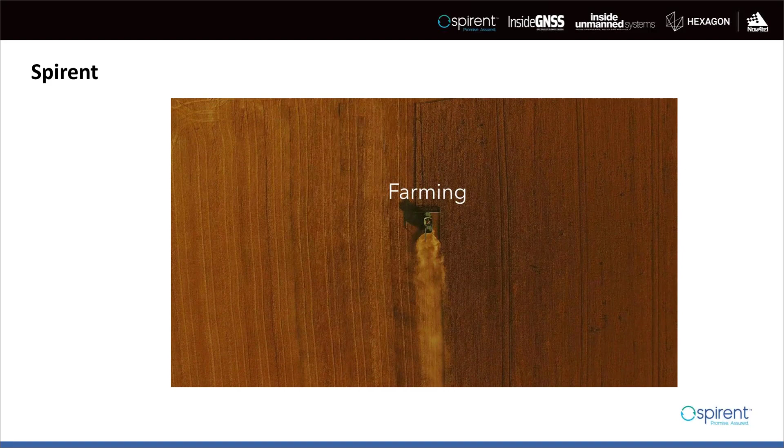You may know Spirent as a GNSS simulator provider. This is something we've done for over 30 years and remains at the heart of what we do today. No one supplies more GNSS signals than Spirent. What you may not know is that in addition to our products, we provide test and evaluation services, and not just limited to GNSS. Increasingly, GNSS is used alongside other sensors and signals, and yesterday's talk did take you through some of our sensor simulations.

Spirent supplies test and evaluation solutions that provide coherent emulation of whatever combination of signals and sensors are required. To do so, we work with industry leaders across the sectors to provide integrated solutions. Our aim is to provide solutions to PNT test challenges that are realistic and support multiple signals and sensors. We do this from internal development and through partnering with industry leaders.

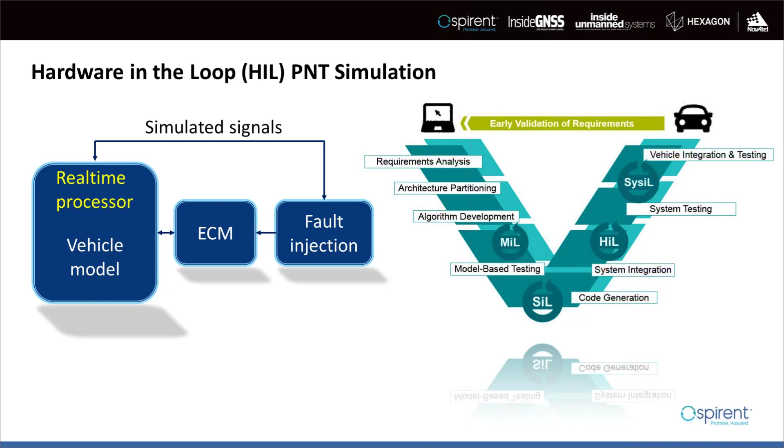To enable these failure modes to be set during each automated test, a fault injection unit is used, and as you can see on the plot, there is a fault injection block, which for our purposes is essentially a PNT simulation system. So what do we have here? Here is the setup of our vehicle sensor simulation in a HIL environment. Again, HIL is hardware in the loop for short. The simulator simulates all sensors, including GNSS, IMU, wheel ticks, and any or every other vehicle sensor.

The input to this simulator is a real-time 6 degree of freedom trajectory information that comes from a vehicle model from the previous slide, if you can relate this. Spirent does not believe in reinventing the wheel, and hence we're working with top-of-the-class vehicle modeling companies that provide realistic motion models and trajectories as input. We have also made sure to be compatible with almost the industry standard hardware platforms that are running real-time operating systems. This motion model is converted into RF signal for GNSS and is translated or mapped onto a CAN bus for other sensors and sent to either the ECU or a GNSS receiver.

Now, if you note from our previous V diagram on the previous slide, HIL comes just before the final vehicle level test or pre-production level testing, which does involve having a vehicle in the loop, which does get expensive. And you want to simulate the test environment in HIL with as much realism as possible to rule out any fundamental issues in the system before transitioning into the vehicle in the loop setup. So back to this setup here, as an option, we also offer a realistic multipath simulation capability to add the richness, to add the realism of the overall HIL rig. And Ali will be talking about the multipath simulation capability and ray tracing later on today.

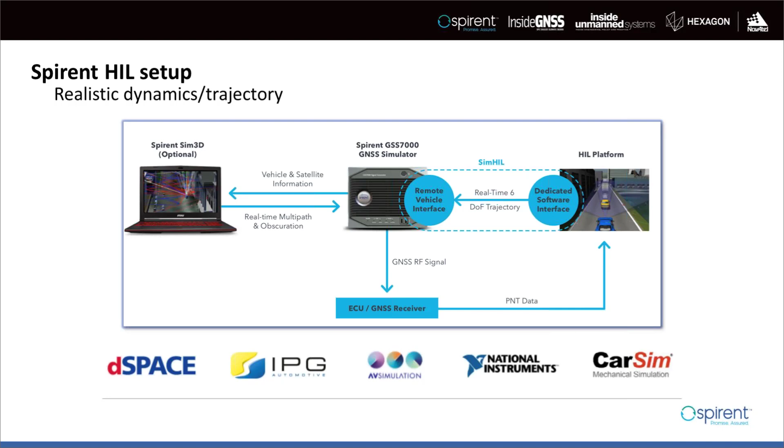So who needs HIL setups? So predominantly OEMs who want to test with realistic vehicle models can integrate GNSS or PNT in a bigger HIL rig.

As you might have picked up already, each HIL rig represents a single vehicle. In similar fashion, Tier 1s can also test in HIL environment by including relevant ECUs in the loop, but with a more generic vehicle model rather than a very specific vehicle model that the OEMs use for their testing.

HIL setups are gaining momentum in all industries, including UAV, aviation, and space. As you can imagine, the core of the system needs to be with low latency. And Spirent is known to provide industry-leading simulators with lowest system latency overall.

With that said about HIL, we think that the audience here will also be interested in understanding a bit more of how we can enhance PNT performance in a real vehicle-in-the-loop system. This is where tapping into the sensor connectors becomes critical to mock relevant sensor inputs.

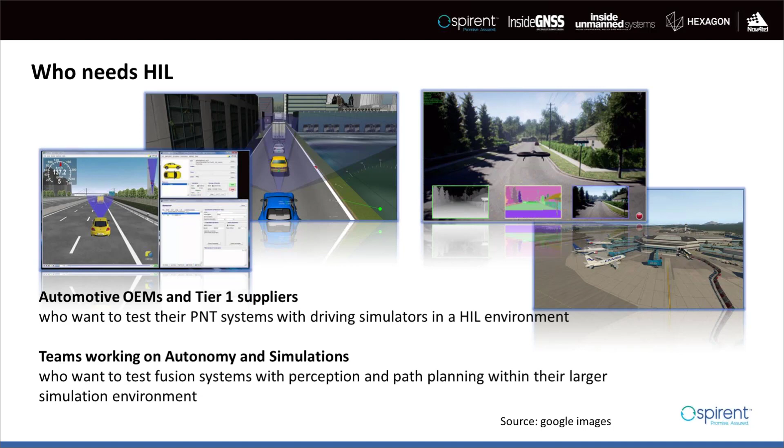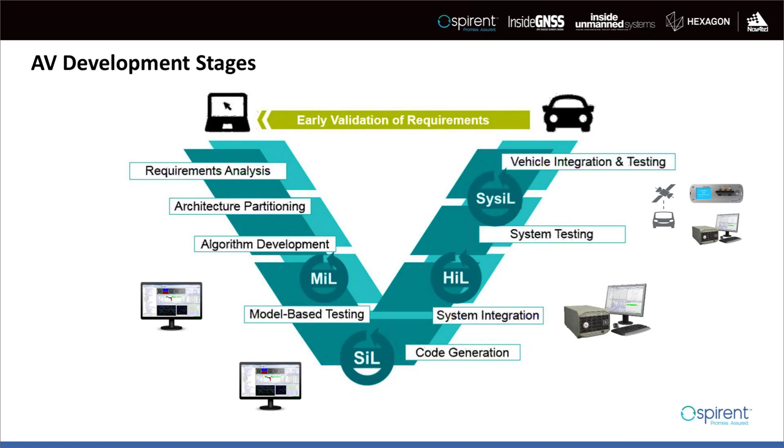As the development matures, different approaches will be necessary. For example, simulation will be necessary during the system integration and hardware-in-the-loop testing, as Ajay just highlighted. The final level of the validation stage will involve all three approaches of testing, including live sky. With a credible and realistic simulation, live sky testing will be minimized. I would like to highlight again this boundary diagram concept that Groot showed in yesterday's session.

Clearly, there are many faults that have to be considered. It was highlighted also yesterday by Lance that the only practical way to do such tests for a complete test coverage, including corner cases, is using simulation.

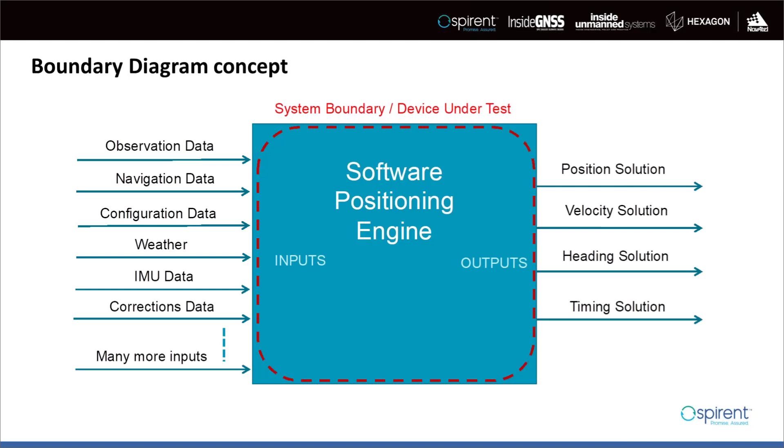GNSS simulation gives you the ability to manipulate all parameters in the three different segments of any GNSS constellation. Spirent GNSS simulator provides the ability to test many of the relevant errors directly using the internal models, or even indirectly by manipulating the constellation and the signal parameters, for example, the signal power level, code, or carrier phase.

Let's break the testing into basic and advanced level testing. Basic testing like time to first fix and position accuracy may appear unnecessary as those parameters are stated on the supplier datasheet, but it is also important to test for those because many errors and performance issues are introduced post-integration.

For example, what is your actual TTFF after integrating the antenna to the solution and then integrating the positioning solution within the vehicle alongside all the other systems that may affect the weak GNSS signal? It is therefore important to test even the basic parameters.

Advanced testing covers corner cases and focuses on application-specific testing, for example, multipath and obscuration in urban environment, and other signal vulnerabilities, which I will cover in more detail in the third session. Advanced testing also covers compliance testing, which Lance will cover in the next session.

So like with any test equipment, there has to be a good level of confidence in the test kit to ensure the credibility of the testing. This is particularly relevant for safety critical applications where human lives are at stake. When choosing your GNSS simulator, there are multiple factors to consider.

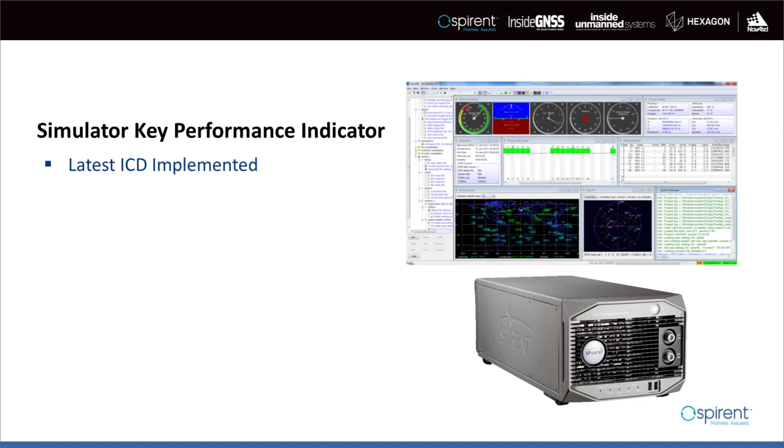First, does your simulator support the latest interface control document, or ICD? Some new signals and updated ICDs are not even live yet. A credible simulator should have any latest ICD implemented as soon as they are released. Other factors to consider are the hardware update rate or simulation iteration rate and the corresponding fidelity and accuracy of your simulator.

Especially in corner cases and hardware in the loop environments, it is essential that the hardware is optimized to the GNSS signal to ensure maximum control over the overall system timing and performance. This is when using specific hardware and FPGA design for GNSS is much more beneficial than off-the-shelf SDRs.

Scalability is another factor that needs to be considered. Can your simulator scale to more frequencies and constellations as your test needs increase? And most importantly, does this scalability compromise the performance? Other factors to consider are how easy it is to integrate the simulator within your automation tool, as well as whether your simulator is calibrated against a known standard like ISO 17025.

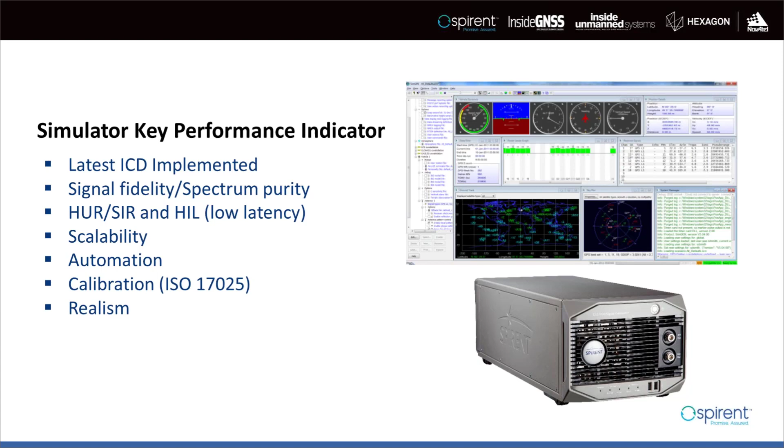Finally, I would like to highlight realism. This is important to give your testing the necessary credibility and assurance that what you are testing with is indicative of real life. There are different aspects that could be considered when considering the realism of your testing. The first one I would like to highlight is atmospheric effects.

It is essential that a GNSS simulator is able to replicate to a degree the level of errors in the signal as a result of either ionosphere or troposphere or even scintillation. It is also important that you have the ability to define those errors in the simulator to replicate a particular test case or behavior seen in the field.

The next aspect of realism is environmental effects surrounding the vehicle. This could be buildings, traffic signs, or even pedestrians. I will discuss this in more detail in the third session.

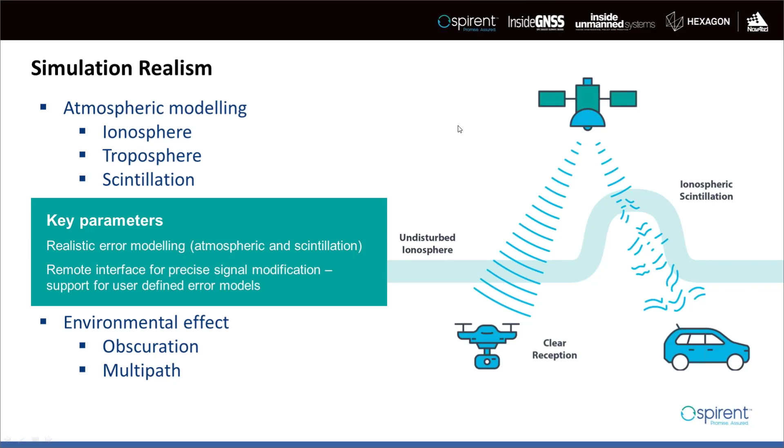Let's now look at the other approach to testing, the record and playback system, which I will refer to as RPS. So how do you iterate, design, and test GNSS urban environment performance realistically, but also repeatably in the lab? RPS is the answer.

The way an RPS works is that it samples the RF analog signal and converts it to digital IQ data that is stored on a storage device like an SSD. During playback, the digital IQ data is converted back to analog and output to your device under test with the same level and fidelity that was captured in the field. As well as GNSS signals, an RPS system could record other signals of opportunity, as I will show in the next slide.

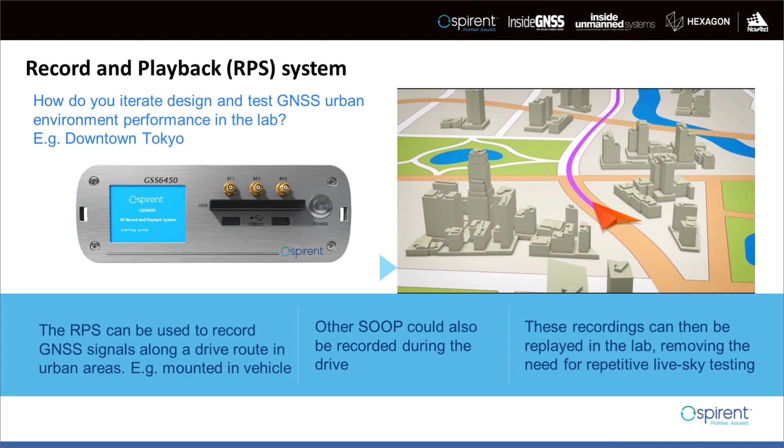There are multiple factors to consider to ensure your RPS system is up for the job. The first of those is the quantization level during the sampling process. Higher quantization levels not only ensure that the signal will be captured with the highest fidelity, which is important for precise positioning applications, but also ensure that the dynamic range of the system is high enough to capture both the GNSS signal and any surrounding interference, or even strong fading in the signal in deep urban environments.

4-bit I and 4-bit Q is the minimum quantization level we recommend, but 8-bit for each of the I and Q is also important to ensure that a signal is captured in all cases, especially in deep urban scenarios. Next factor is the clock stability and possible added phase noise. The majority of high precision systems rely on both the code and carrier phase of the signal to compute a precise solution. A record and playback system should capture the signal and replay with as little added phase noise as possible.

Another important factor is the availability of large storage for your record and playback system. As you see in this table, just over 1 hour of recording for 8-bit 2 frequencies uses about 1 terabyte of storage. So it's essential to ensure your RPS system supports the necessary internal and external storage so as not to limit the test duration. Finally, a record and playback system should capture more than just GNSS to ensure good test coverage.

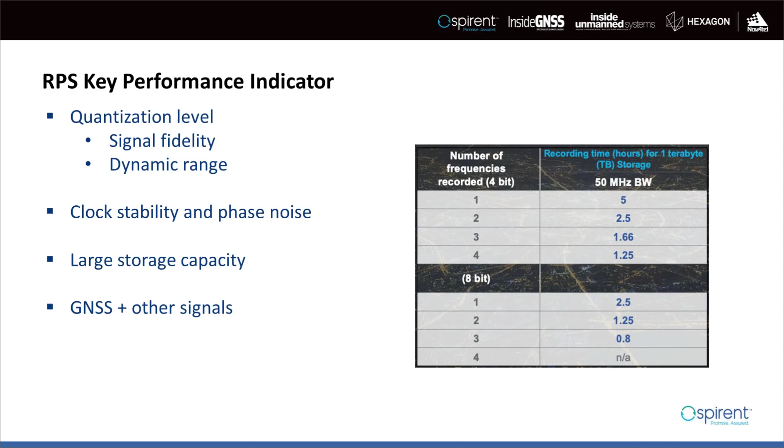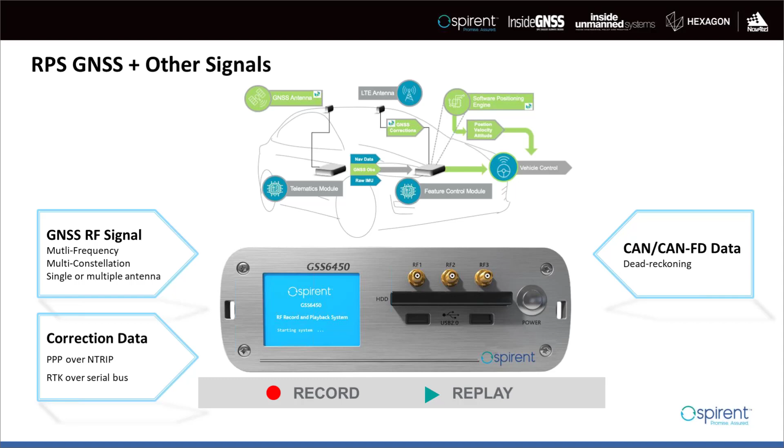You may also want to capture your CAN or CAN-FD data, which will include the dead reckoning sensors and maybe even an additional IMU. And finally, you may want to record other IMU outputs as a reference, or even a video camera capture of the surroundings. The most important point to make here is that your record and playback system should allow you to record and replay all of those signals in sync with the GNSS signal without the need for any additional tools or synchronization. This concludes the first session.

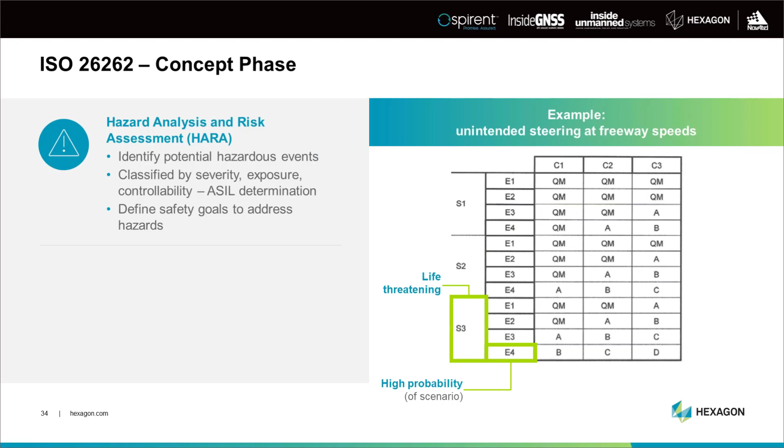And the controllability is the highest rating, which is uncontrollable. And this is controllability by the driver, not by the systems. And so because we're talking about a fully autonomous system, the driver is not going to be controlling it. They may not be paying attention. And so it gets the highest rating. And so based on those ratings, that's how we arrive at the conclusion that autonomous driving systems will be ASIL D, which is the highest rating.

So you do this for all of the possible hazards in your system. You define safety goals to address these, and then you come up with a functional safety concept. And this is where you start thinking about how are you going to actually achieve those safety goals? What features are you going to put in your system that will mitigate against them to make up for the fact that the driver can't control them?

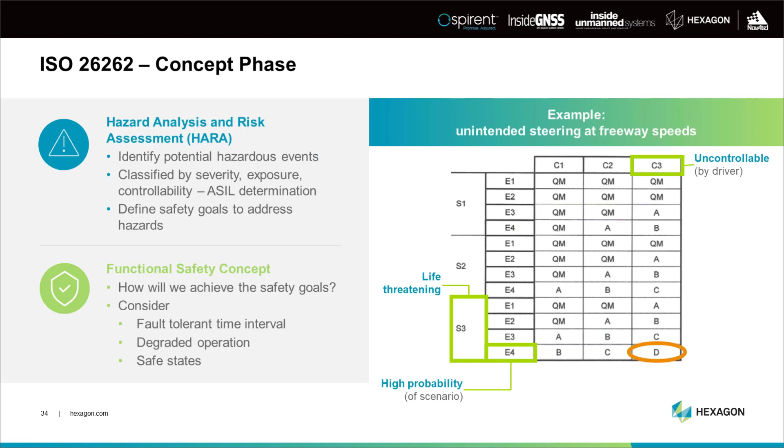So you think about things like the fault-tolerant time interval. How long can your system still perform after a fault occurs? Do you have any sort of degraded operation, or do you immediately fail? What are the safe states of your system? How do you transition to them? What other systems are available to operate when you're in a safe state, and so on.

Then we move into the system design phase. In the system design phase, you decompose your functional safety concept into a technical safety concept where you allocate those requirements to your architecture. You start identifying specifically where you're going to implement these safety functions. Then you proceed with the rest of your design. Your safety requirements get included with all of the performance and functional requirements that you'll have. You work that design all together, and you'll perform a safety analysis.

And the tools for this would typically be FMEA, FTA, DFA, dependent failure analysis, which in automotive, you'll be doing these anyway, especially FMEA. The difference here is that your focus now is on failures that lead to a violation of the safety goals. A classical automotive FMEA may be more focused on reliability concerns, but with the 26262 safety analysis, you're really focused on the safety consequences of failures in your system.

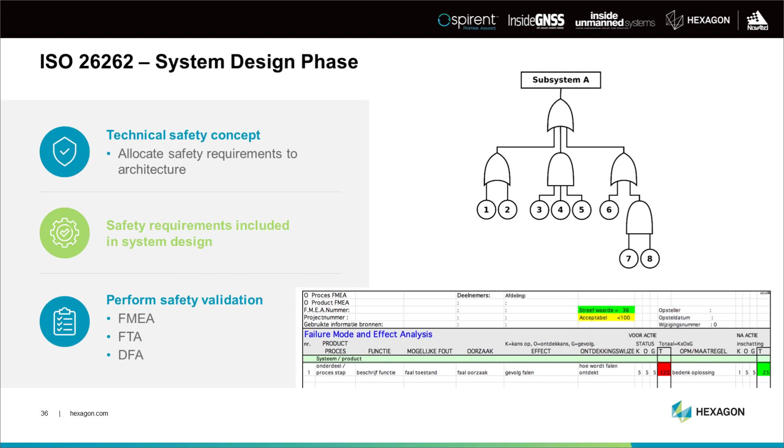You then move on to hardware and software. If I could go back a slide, actually. So there's two sub-Vs in the 26262 V model showing that hardware and software occur simultaneously. On the hardware side, again, you do the safety development along with the rest of your development. You have hardware safety requirements decomposed from the system safety requirements that you work with the rest of your design. The big change that the standard brings here is the hardware metrics. This comes from the FMEDA, Failure Modes and Effects Diagnostics Analysis.

And this is essentially a very comprehensive calculation of each individual component in your system, its rate of failure, and what that failure will do. And so you can add up the total failure rate of your system, and you can understand at the component and subcomponent level how all of these individual failure rates contribute. And you get a bunch of metrics out of this: how resilient your system is to single point faults or dual point faults, what the safety considerations are of latent faults, or the overall failure rate, which is FIT, failure in time.

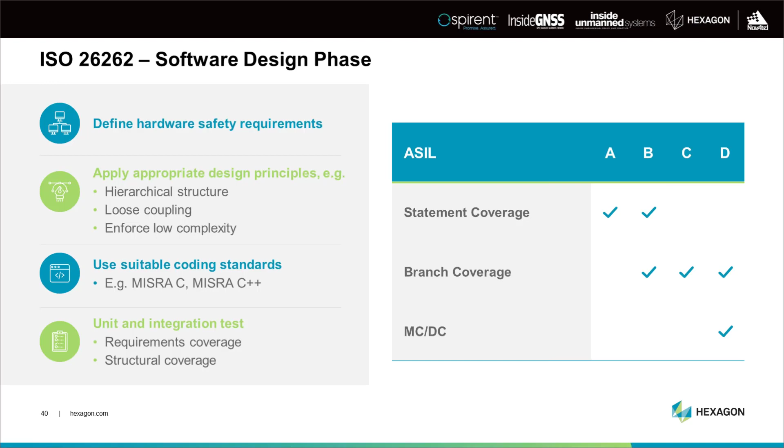So it's not calling for a fairly direct requirements-based pass-to-fail approach. It really is encouraging you to do more comprehensive, more robust testing, trying to exercise those failure conditions, test to fail, make sure your system is robust and it handles in an appropriate way when these conditions occur.

And then the last note here about testing I want to make is the standard requires confidence in your tools. If the tools you're using to generate or analyze data fail, that can lead you to misinterpret the data, and it can cause you to have failures in your system. So you have to have an analysis of your tools similar to the HARA. You consider how likely they are to lead to failures, and how likely it is that any failures in your tools would be noticed elsewhere in the process. And then you assign a tool confidence level to each of your tools, and that imposes standards and requirements that your tools have to meet.

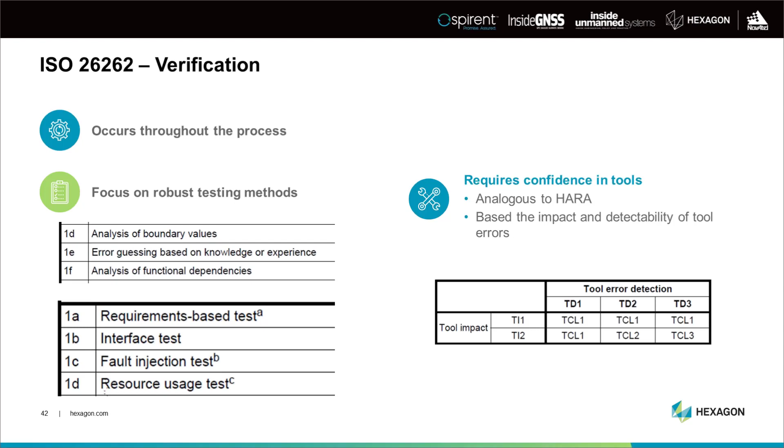Thanks, Lance. Quick question for you about that last slide and ISO 26262. Is following ISO 26262 mandated by any regulatory body? Not by a regulatory body. There's no standards that say that you cannot sell a vehicle if you don't apply this standard. But it is considered the state-of-the-art for safety-critical development in automotive.

And so from a legal perspective, a liability perspective, following 26262 is the de facto standard. If you're doing your due diligence in developing these systems, you should be following this. And you would have a difficult argument to make if you had a liability and you chose not to follow this standard. Right, right.

Ajay, reaching back to your presentation, how was Realism or Sim3D as a solution validated? Right. Okay. So Sim3D, as with any of our product line, does go through a rigorous test and validation process internally. And beyond that, what we have done is we have collected some sample data points from the field, reproduced the same scenario in a simulated environment with Sim3D, with all the ray tracing happening, and we try to correlate and see, or maybe even tweak further, how good Sim3D is.

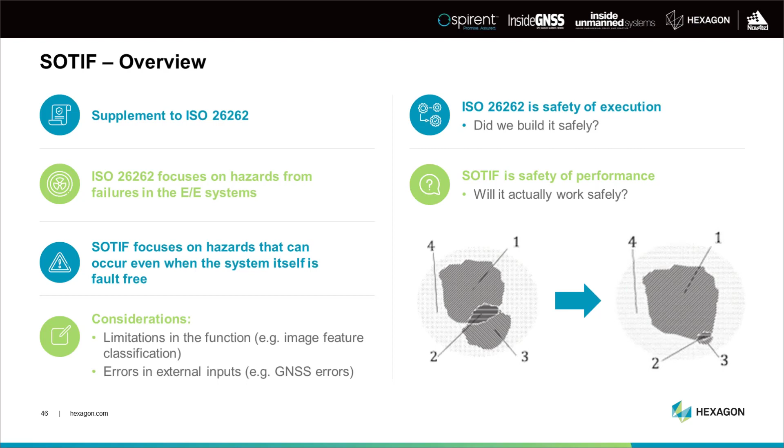So SOTIF is tied into the 26262 process model. It calls for additional activities occurring at various steps. And one of the main ones up front is you do a hazard analysis very similar to the HARA in 26262. The difference in SOTIF is that you have to consider different triggering events. So you consider the environmental conditions as a possible trigger.

So for example, if you're using a camera to observe the lines on the road, but the road is covered in snow, or if you're using a camera for feature recognition, but you have rain mist on your camera, those are very plausible environmental conditions, and you have to think about how those affect your system. You think about the limitations of your system components, so the resolution of a LiDAR or so on. Foreseeable misuse. If you have a front-facing radar and someone puts a grill cover on the vehicle, what does that do to your signal? Can your system handle it appropriately?

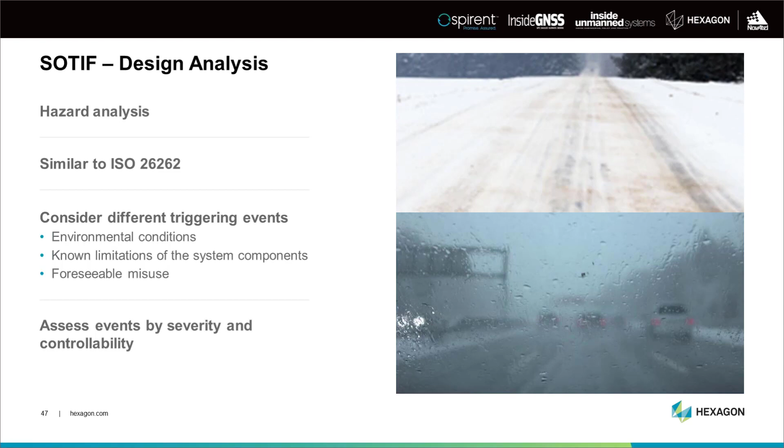Those sorts of things. Then, like with the 26262 HARA, you assess the events by severity and controllability, so you can see which ones are acceptable and which ones are not. Any risk that is unacceptable, you modify your design to reduce the impact of that risk. So you could improve the performance of your sensors, choose cameras with higher resolution, LiDAR with a faster scan rate. You can restrict the operating environment. So for example, only allowing a feature to be used on a divided highway if the risk of crossing the center line is too severe.

You can add additional monitoring or fallback, more sensors, more redundant systems if you need to, or you can improve testability. So if you can better observe a possible failure through verification, you can be more sure that it's not going to get into the series production product.

And then the other main part that SOTIF talks about is the verification and validation process. So all of your test design also has to consider these SOTIF-style risks, the external factors, the misuse. So you have to consider and design test cases that will stimulate some of the same things that you thought about in your hazard analysis. And then at the end of your verification process, SOTIF calls for you to evaluate the residual risk of your system. And there's a number of different methods recommended for that.

Randomized HIL-SIL testing. You can do large-scale fleet tests. You can do simulation. And so the HIL-SIL and the simulation get to the topics that Ajay and Ali have been talking about. You can also have support for this through analysis. And as I talked yesterday with the fault tree analysis for GNSS integrity, this can be a way through SOTIF we can analyze the residual risk of our system.

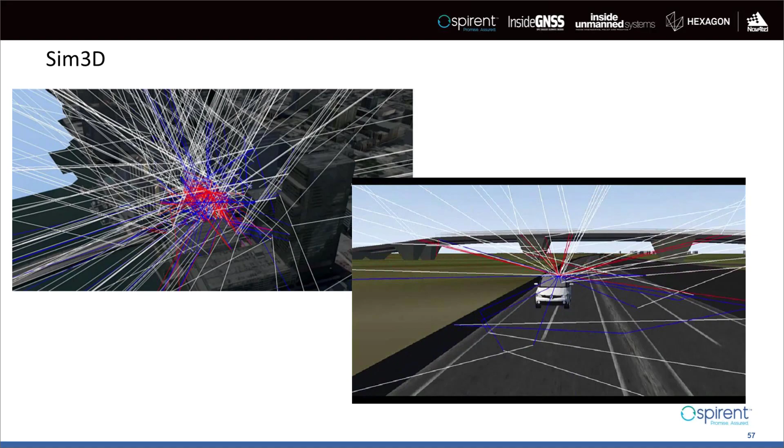A tool like SIM3D takes into account the vehicle 3D model as well, so the user is able to import their own vehicle 3D model to the environment. It would have been impossible for such use case to be achieved with that level of realism without having SIM3D.

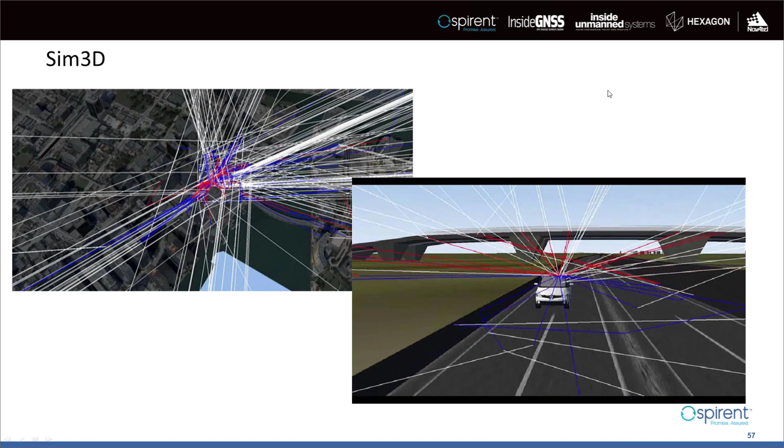Let me now focus a bit on GNSS antenna. GNSS antenna is an important factor in the performance of the overall positioning engine. Over the years, there have been many advancements in antenna technologies that could support sub-meter accuracy, but this doesn't necessarily mean that those advanced antennas are suitable for production level automotive. There are many factors in play, and in particular cost, of course.

In the early stages of development, testing your solution with a representative antenna is not possible. Simulation should provide a level of antenna testing enough to represent the real performance. There are many factors a simulator should take into account. For example, the antenna pattern. It's important to test with a representative antenna pattern for both the gain and phase. It's also important to highlight that the final antenna pattern will change once the antenna is integrated in the vehicle. Other factors a simulator should factor for are the antenna polarization and even the placement of the antenna relative to the vehicle.

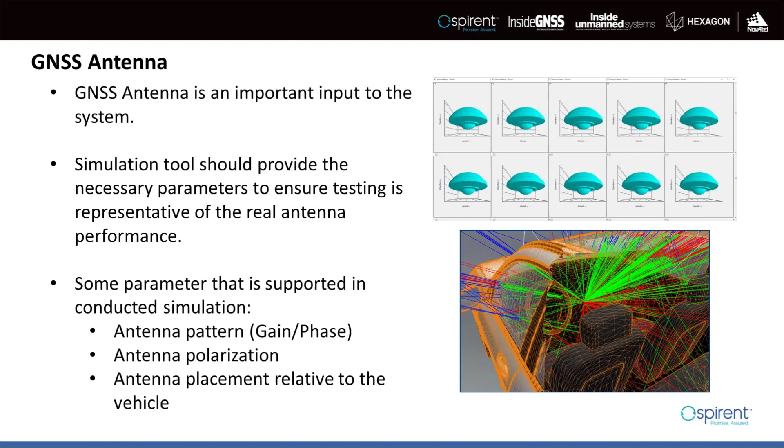One approach I would like to highlight when testing the complete system, including the antenna, is the over-the-air zoned chamber approach. This is different to the typical over-the-air approach where only one single antenna is used to radiate all the signals from one direction of arrival. In this new approach, which is patented by Spirent, the sky is divided into different zones, with each zone having their own azimuth and elevation boundaries. The signal is transmitted from the right direction of arrival, and this allows the testing of the complete solution while ensuring the antenna's own gain and phase pattern is used without the need for modeling in the simulation.

Sim3D can also be used in the zone chamber environment. We even ensure that the multipath signal for each line of sight is radiated from the correct direction of arrival. This ensures that the best realism possible for a complete solution is achieved.

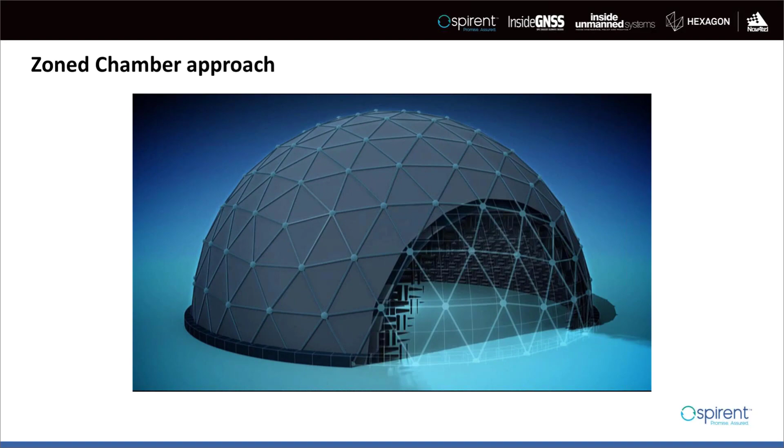So let's now look at spoofing and interference. Spoofing was once extremely hard to do, but recent demonstrations have shown it is now easy to build a GNSS spoofer from open source software and low-cost components. False location and time readings can have severe impact on the autonomous vehicle. Anti-spoofing capabilities are improving, but so are the spoofing techniques and sophistication. It is essential to test for spoofing attacks and ensure appropriate flags are raised when a spoofing signal is received. Important key parameters to consider when simulating spoofing are the signal fidelity of the spoof signal and access to a dedicated spoofing tool and scenarios to help you orchestrate a repeatable, successful spoofing attack.

Spirent have multiple capabilities that enable testing for spoofing attacks. For example, simulating up to 12 copies of a single constellation. You will be able to have full manipulation over the parameters of each constellation, for example, the orbital data, the signal properties, or any additional error. Spirent also provide the ability to simulate multiple vehicles, each with a specific trajectory. One vehicle will act as a DUT and another will be your spoofer.

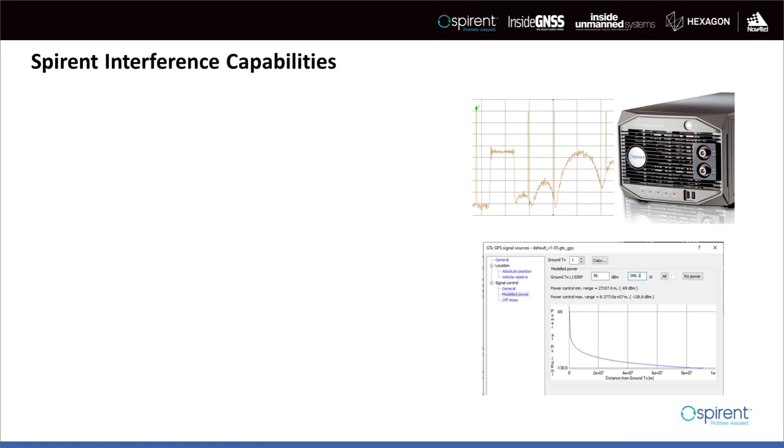Spirent does offer multiple interference simulation capabilities. The first solution I would like to highlight is the embedded interference. This allows the use of the simulator to simulate simultaneously the GNSS and interference signals from the same simulator. Up to 8 in-band interference sources can be simulated, each with realistic power modeling and precise phase alignment.

Different interference types could also be simulated, for example, CW signal, PSK, and AWGN signal. The next capability I would like to highlight is the GSS 7765 interference simulation system. This comprises one or more high-quality commercial signal generators plus an interference combiner unit. Up to plus 10 dBm of output power could be simulated with a broad range of interference signal options for both in-band and out-of-band interference. Okay, this concludes session 3 of this webinar.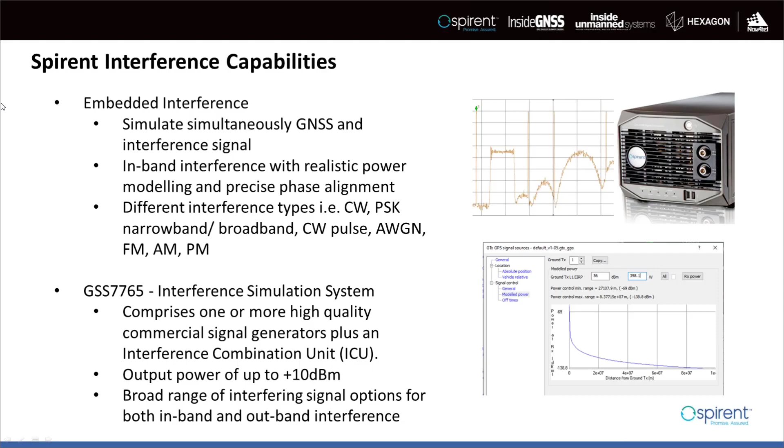But right now, we're going to ask you a question, audience. What are you most interested in testing for? Yes, it should be up on your screen at this moment. Responses, as you can see on the screen: basic system performance, sensitivity, accuracy, TTFF, etc.; performance under spoofing and/or jamming conditions; standards compliance, ISO 26262, SOTIF, etc.; or all of the above are equally important.

Okay, it looks like 20% coming in with basic system performance, sensitivity, accuracy, TTFF, etc. We've got 24% coming in with performance under spoofing and/or jamming conditions, 11% with standards compliance, and 45% feeling like all of the above are equally important. Any thoughts here, Alan? Well, of course, all of the above is the safe answer. It covers all your variants, all your aspects. First among equals, spoofing and jamming. I think that's well reflected in all the conferences I've been to recently over the past 3, 4, 5 years.

Basic system performance, close behind. Standards compliance, that's perhaps a little bit further down the line in concerns of the audience in terms of fielding products. You want to nail your performance under spoofing and jamming and basic sensitivity and accuracy, and then before you actually take the product to the field, you better be sure that you have your standards right.